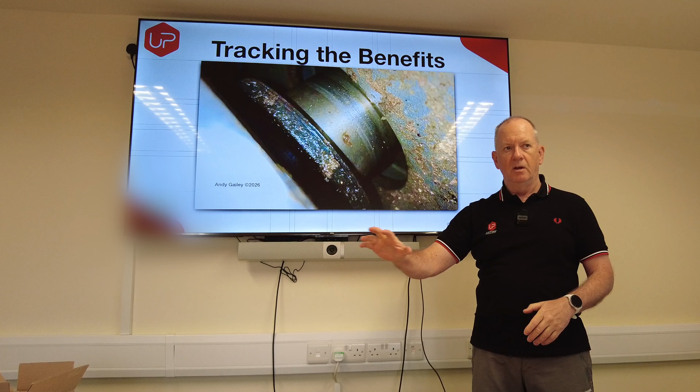That can't be picked up by any of the technology. Technology can't pick that up. People have to go and have a look - routine inspection.

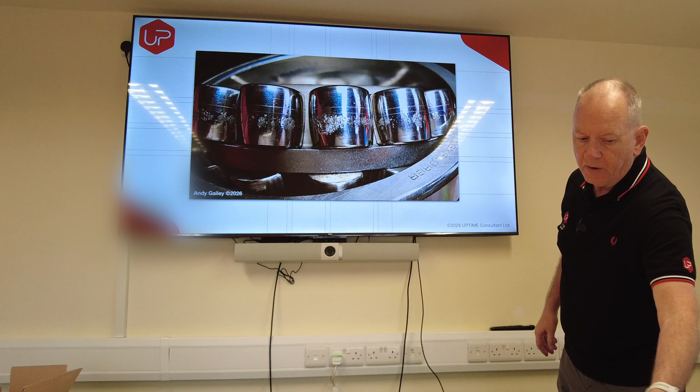We're going back now to the extruder we looked at right at the start. So this is this Explorer bearing. It's not the exact bearing, this one is a second one. They're quite big bearings, as you can see, in that transfer gearbox - double row spherical roller, because there's quite a lot of side load on this as well.

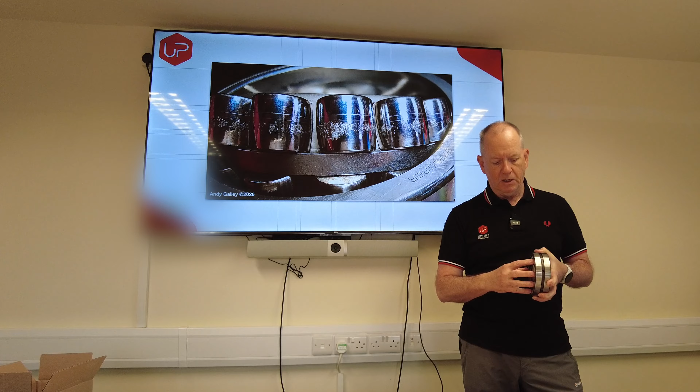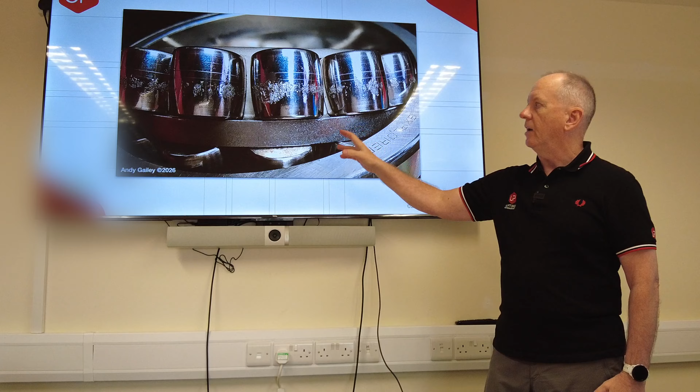This is off the pinion part, so this is off the part that comes out of the main motor drive, and it's in a certain area where it does get oil fed. There's a splash, a spray bar in there, but it's kind of up there, not down there where there'd be more oil flow. This is a type of damage where you're losing material from the surface of the bearing, where that could last days, or it could last hours. It's one of those ones that can go very, very quickly from that to destroying the cage. And once it's destroyed the cage, everything goes sideways.

So this was picked up through condition monitoring with acoustic emission detection and then verified with oil sampling. We used two condition monitoring methods to pick this up.

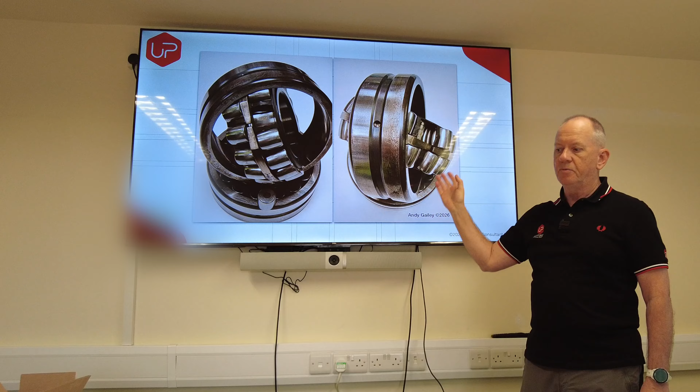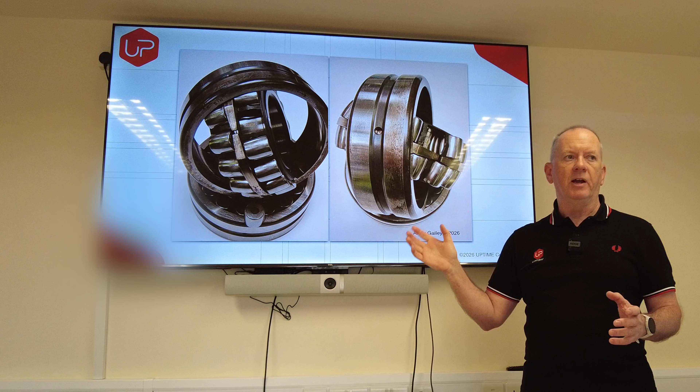So this is a bearing from another angle, and what I've done, I've taken one of the rollers out so you can see this one. There's material being lost on the inner ring. So that's important, and this one is quite important as a find, because this is the first time for me that I'd actually found something with the technology and said the inner ring on this bearing has something wrong with it, before it was taken out.

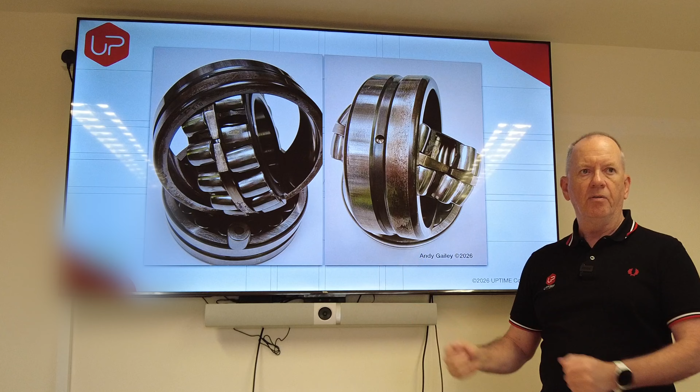So when we took it out and retrieved the bearing, we could actually prove that the technology gave the right failure. And that was one of the things that made the engineering and operations manager go, wow, we now believe in condition-based maintenance. Of course, this was a very critical asset.

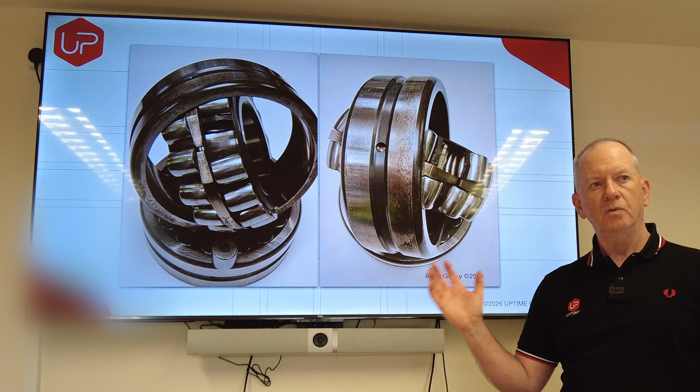4 out of 5 maintenance engineers in any plant are actually working on bringing assets back to life because they've failed. What that means is when you go onto a shift, you know that you're going to go and fix something that day. I lived that as a maintenance engineer for many years, where I knew at the start of the shift block that the handover was going to be 'it's not right, and there's these things to fix.' That means those assets are controlling us. They're in control, we're not in control.

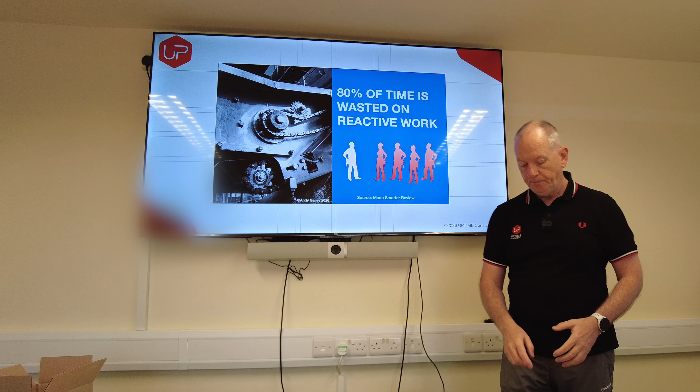This is a picture of a fryer, by the way, with the hood up. The thing with fryers is you can't see the bearings, so you can't condition monitor them in situ because they're sitting in 180-degree oil and they're enclosed.

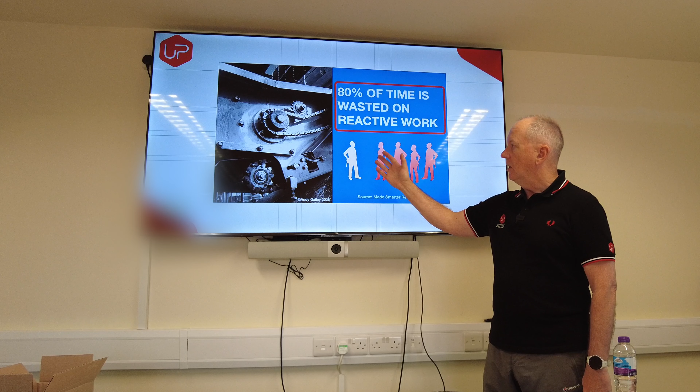But this fryer was particularly important because we did a lot of work on other fryers to get the bearings changed from normal greasable bearings to a polymer bearing, which actually lasted - actually were fit for purpose. The original OEM component wasn't fit for purpose really, because fryers go through caustic boil out once a week, once every 2 weeks, and the caustic gets into everything because that's what it's supposed to do. So that drives all the grease out of all the bearing packs.

So I came up with a solution from a US company I found that produced polymer manufactured bearings - the same bearings as an SKF bearing, but instead of greasing it, the void is filled with a polymer resin. So there is no grease, there's no grease to get washed out. In fact, there's no void for the caustic soda to get into, so therefore the bearings last.

So the piece of work we did on this was I got these fitted as an OEM part before it was built and commissioned. That meant that we had no fryer bearing problems.

Fryer bearing problems are really, really bad in food, because the first you know about the fryer bearing failing is when it hits the mag detectors in packaging. That's the first you know of it. You hear the mag detectors go off, you'll find some iron filings maybe on the magnets, permanent magnets.

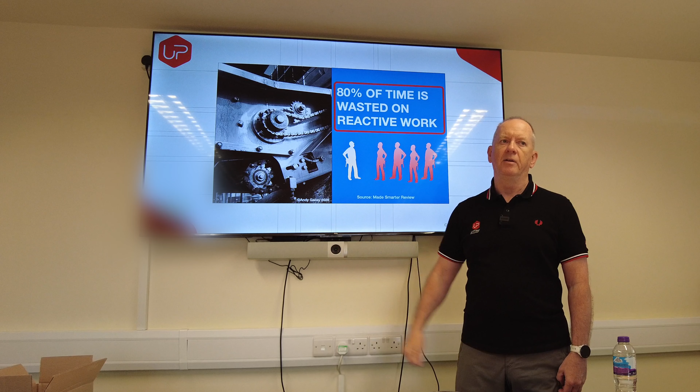Everything gets held, everything's on shutdown. Everything from the last mag detect, which was probably 3 hours ago, gets pulled back. That has to go through checks to confirm it didn't get contaminated. Everything in the fryer - you have to dump probably 2 tons of oil, which is expensive. It has to be super cooled, because it's hard to get down from 180 degrees. Then you have to clean the fryer out and find any bits left in the sump or in the pump. So it can end up being like a whole shift down for a bearing failing in a fryer.